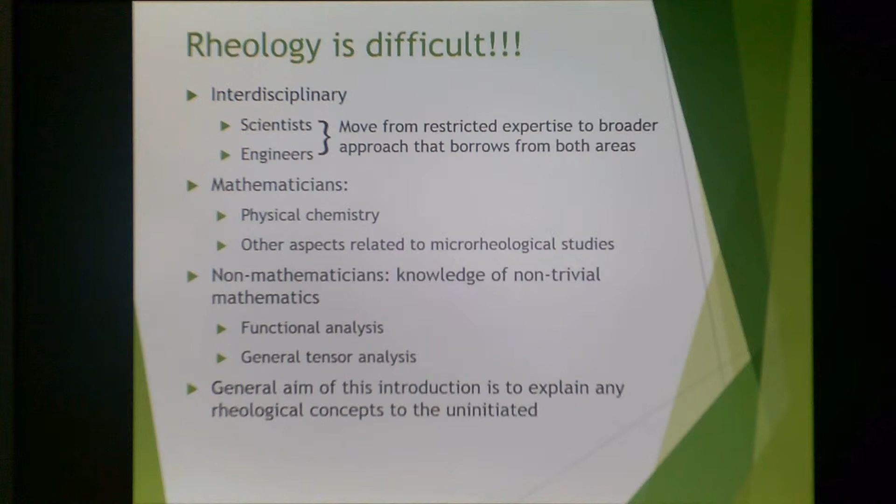The first thing we need to discuss is the fact that rheology is not a basic subject. It is a very interdisciplinary subject, and it can be very difficult to understand. Traditional scientists need to move away from their expertise to understand some engineering concepts, and engineers also need to step in and understand how chemistry, physical chemistry, relates to the materials they're looking at. For mathematicians, an understanding of physical chemistry is necessary, and other aspects related to microrheological studies like interfacial dynamics. For the non-mathematicians among us, a knowledge of non-trivial mathematics is necessary. Functional analysis is part of rheology, and so is general tensor analysis. The general aim of this introductory lecture is to explain rheological concepts to the uninitiated.

Rheometry is the measurement of rheological behavior. Materials are generally investigated in simple flows: steady, simple shearing flow, small amplitude oscillatory shear flow, and extensional flow. The application of these simple flows allows us to avoid some of the mathematical difficulties while still understanding and observing the full rheological behavior.

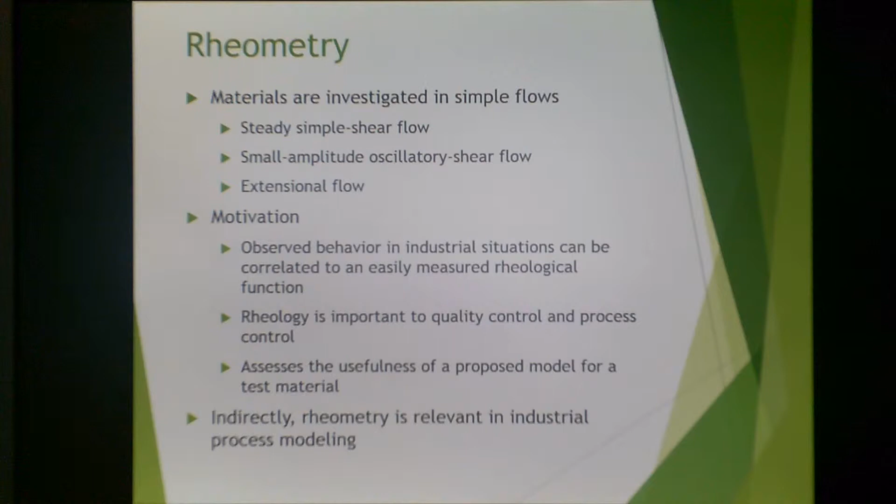The motivation behind rheometry is often that the observed behavior in industrial situations is correlated to an easily measured rheological function. Rheology is important to quality control and process control in an industrial setting, and it is useful in assessing the usefulness of a proposed model for a test material. Indirectly, rheometry is also relevant in industrial process modeling. Understanding the rheological behavior of your material gives you more control over your process.

In the previous lecture, we talked about the modern view of rheology, and that the extremes—classical elastic theory as determined by Hooke's law for solids, and Newtonian fluid mechanics as defined by the Navier-Stokes equation for fluids—fall outside the modern view of rheology. Rheology seeks to study materials that fall in between, the viscoelastic materials, such as Weber's silk thread, a viscous solid, or Maxwell's gases, elastic fluids.

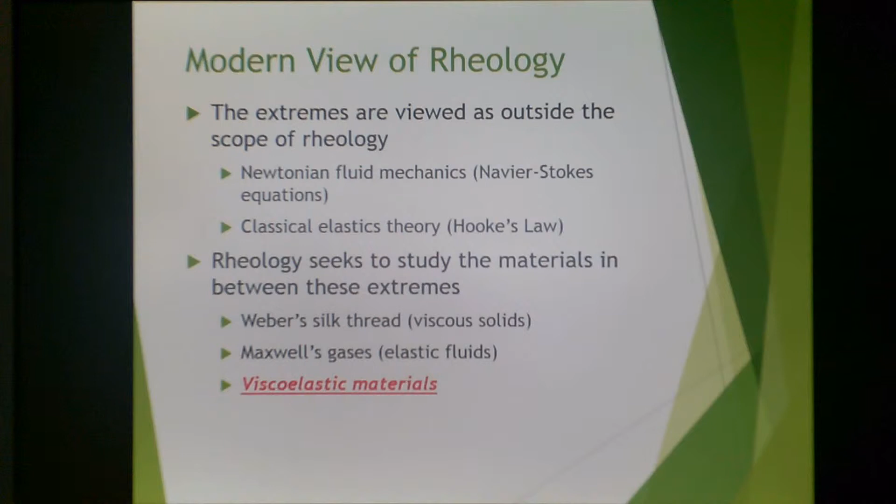There are two important considerations to keep in mind as we move forward. First, intermolecular forces in the material we're looking at control how the material behaves; in other words, chemical nature controls physical response. Second, the time scale of our measurements or observations is very important—different physical responses can be observed at different time scales for the same material, so you have to bring the two together. Rheology seeks to understand material structure from forces and timescales for changes, and microstructural motion from thermal or mechanical energy's effect on the molecules themselves.

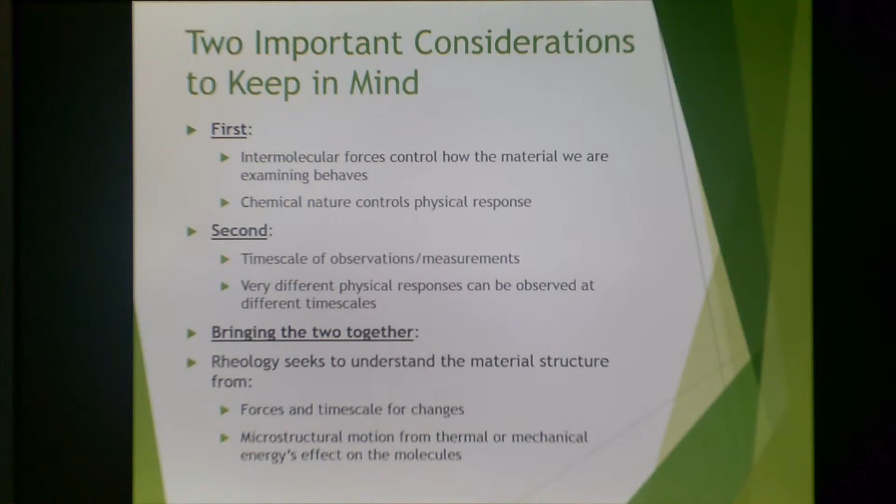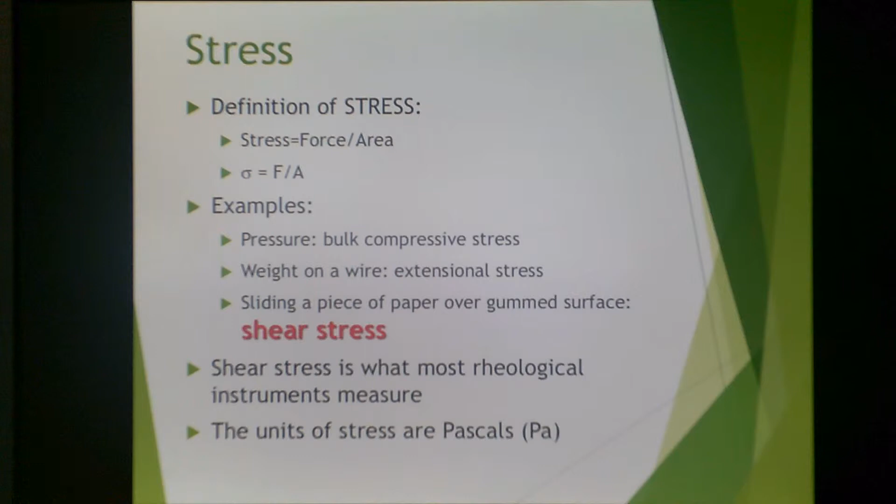First, we're going to define a few terms. The definition of stress is stress equals force divided by area, or sigma equals F over A. Some examples: pressure is a bulk compressive stress, a weight on a wire is an extensional stress, and if you slide a piece of paper over a sticky or gummed surface, that's a shear stress. Shear stress is what most rheological instruments actually measure, and the units of stress in this case are pascals.

Defining strain: when a stress is applied, a deformation or a strain results. For the purpose of measurement, we define strain as the relative deformation, or deformation per unit of original length. So epsilon equals L minus L0 divided by L0, where L is the length after deformation and L0 is the original length.

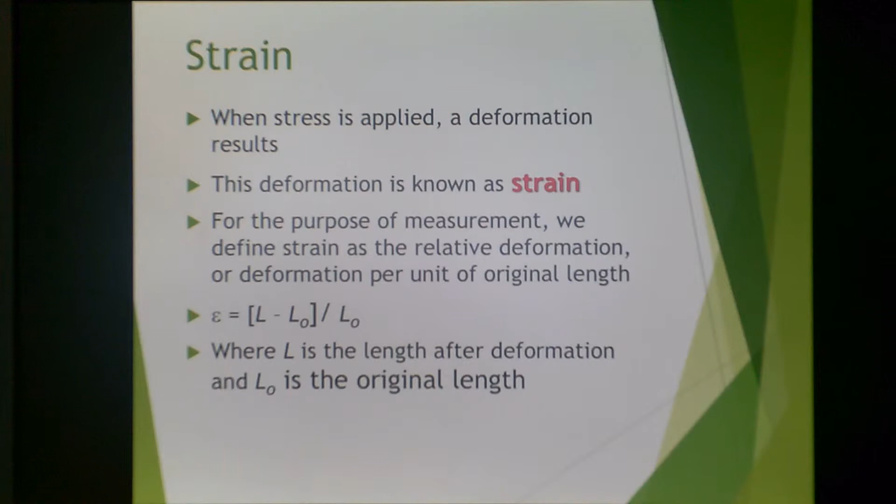In order to understand viscoelastic behavior, we need to first understand the extremes, so we're going to talk about solids and fluids. First, discussing solids: classical solid behavior is when a stress or a force is applied to the surface and results in an instantaneous deformation. Once that deformed state is reached, there's no further movement, no further strain. The deformed state persists as long as that force is applied, and this is considered traditional elastic behavior, things governed by Hooke's law.

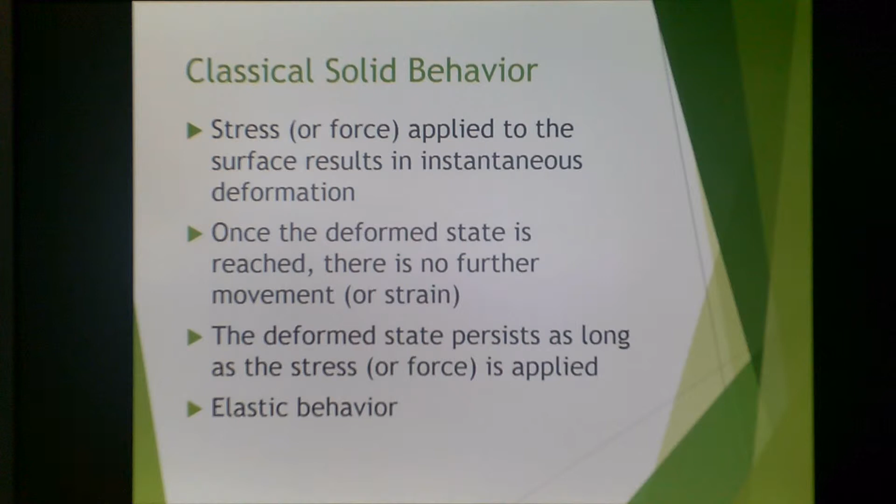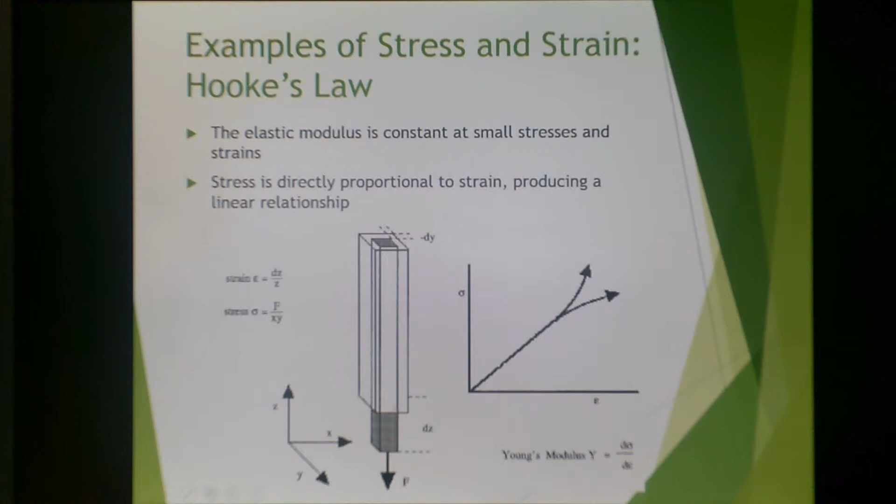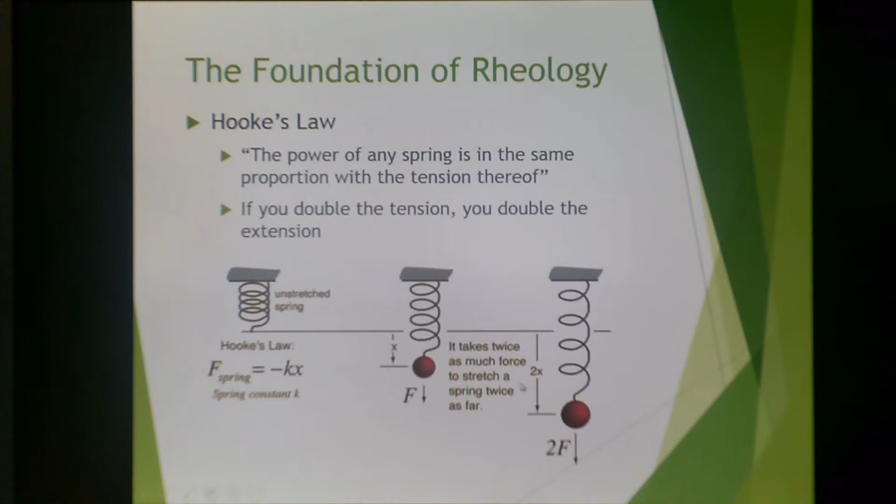This is kind of your traditional spring, which we saw before in our previous lecture. Hooke's law states that the power of any spring is in the same proportion to the tension thereof—in other words, if you double the tension, you double the extension. So Hooke's law is the force on the spring equals the negative spring constant K times x, where x is the displacement. Here we have a displacement x with a force F, so you need twice as much force to get twice as much displacement.

This is an example of stress and strain with no rotation. Shear strain is produced by the application of a shear stress. One of the diagonals is shortening while the other one lengthens, and it's only in one direction.

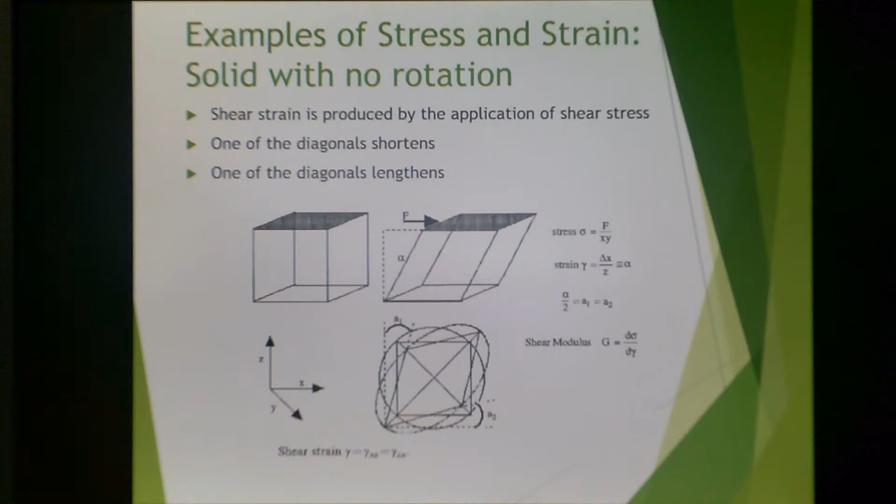This is similar to what we see for a Hookean solid. A shear stress is applied to the surface and results in an instantaneous deformation. Once the deformed state is reached, there's no further movement. The deformed state persists as long as the stress is applied, and the relationship between these two is in proportion. So the stress equals the rigidity modulus times the strain.

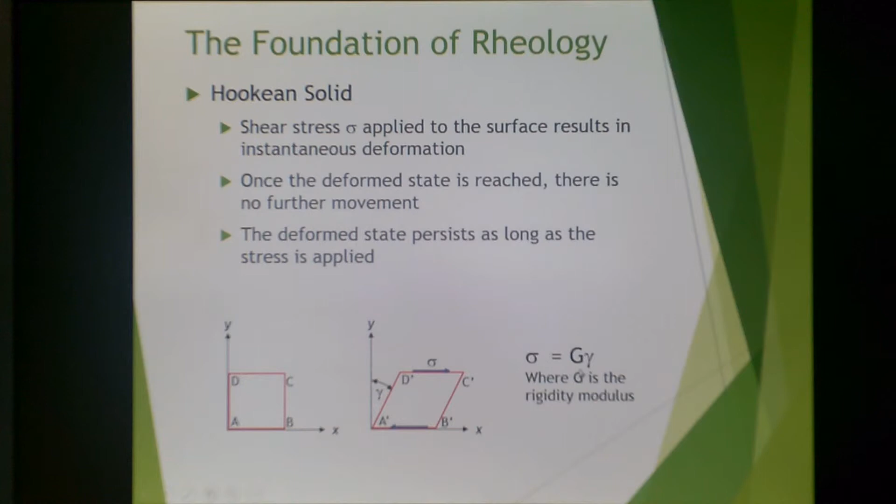Previously we looked at one axis, just pushing on one side. Really, you have to consider all of the axes. Strain is made up of 3 orthogonal elements that can be further divided into components, and these line up with the x, y, and z axes. If we apply a simple strain, gamma, in our rheometer, this is made of 2 equal components, gamma xy and gamma yx. When you restrict to simple and well-defined deformations, you can avoid a lot of the mathematical difficulty and still observe the rheological phenomena.

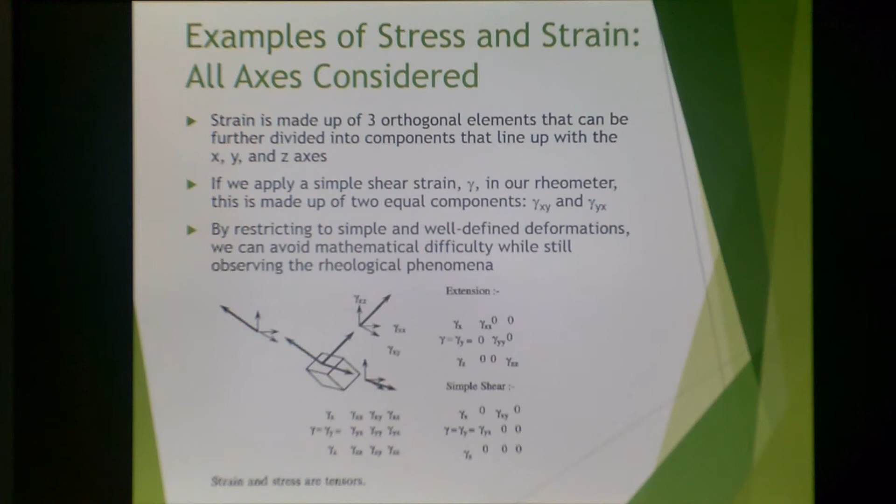You do have to pay attention to the tensor framework. Stress, again, is force per unit area, sigma equals F over A. Oftentimes this is presented as a scalar, and a scalar is a quantity having magnitude and not direction. But you do have to consider a more sophisticated network of tensors to understand rheological concepts. A tensor is a mathematical object that's analogous to a vector, a little more general though. A vector has quantity as well as direction, especially determining the position of one point in space relative to another.

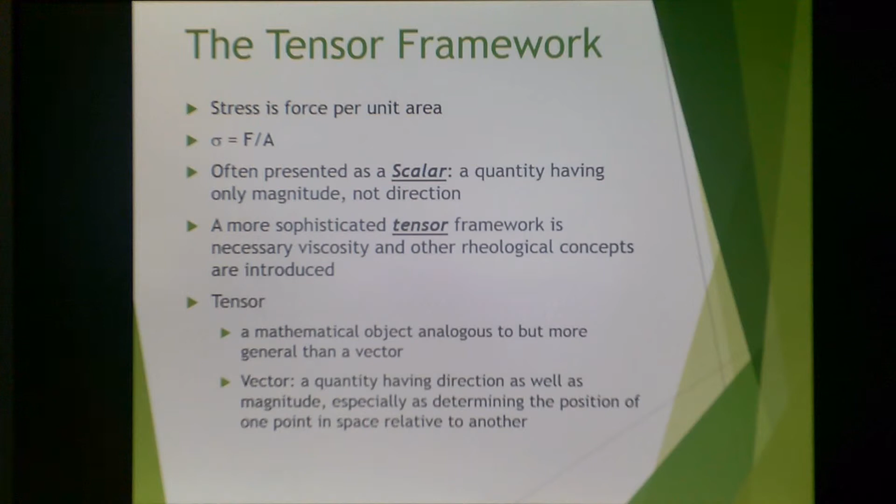Now we're going to look at classic liquid or fluid behavior. Typically we're looking at liquids, but when we talk about fluids, we're not just talking about traditional liquids, we're also talking about gases, though typically the systems we'll look at are actually liquids. In a typical liquid system, motion is produced by the application of a stress, and the motion continues until the stress is removed. A constant stress will produce a constant velocity, or a linear relationship, and this is considered viscous behavior.

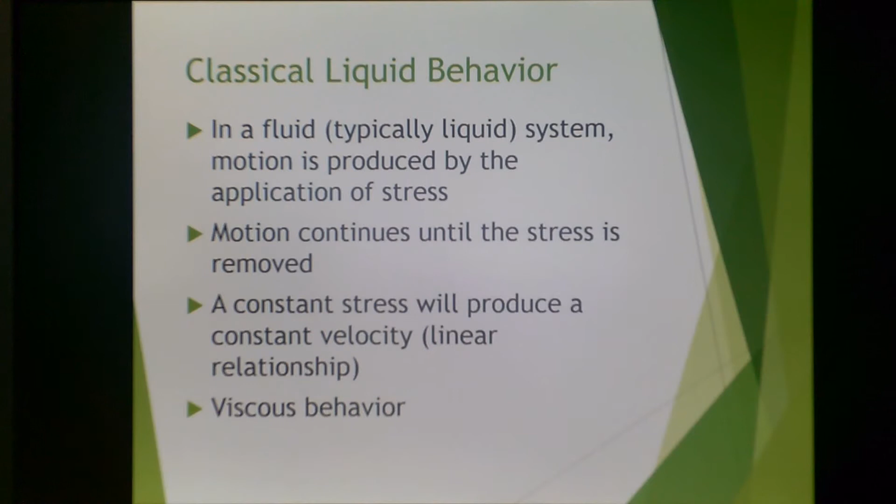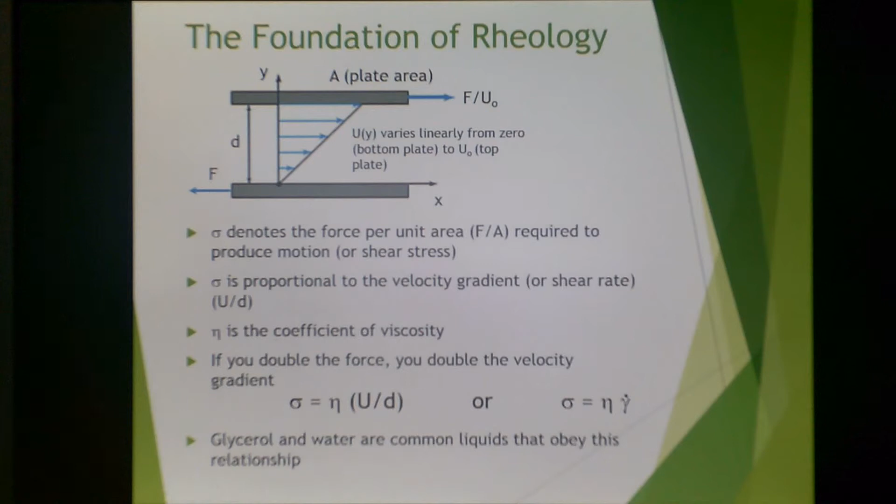Eta is the coefficient of viscosity, or viscosity from this point forward. If you double the force, you double the velocity gradient, so you get this linear relationship: sigma equals viscosity times U over D, the velocity gradient, or sigma equals eta times the shear rate. This is the relationship for Newtonian liquids, and glycerol and water are common liquids that obey this relationship.

For linearity in rheology, these 2 relationships describe elastic and viscous behavior. For a Hookean solid, we're looking at elastic behavior. For a Newtonian fluid, we're looking at viscous behavior, where shear stress is related by a constant to a shear rate, a direct proportionality. Any viscoelastic behavior we've considered thus far is also linear, and this linear framework of proportionality can accommodate a wide range of rheological behavior. However...

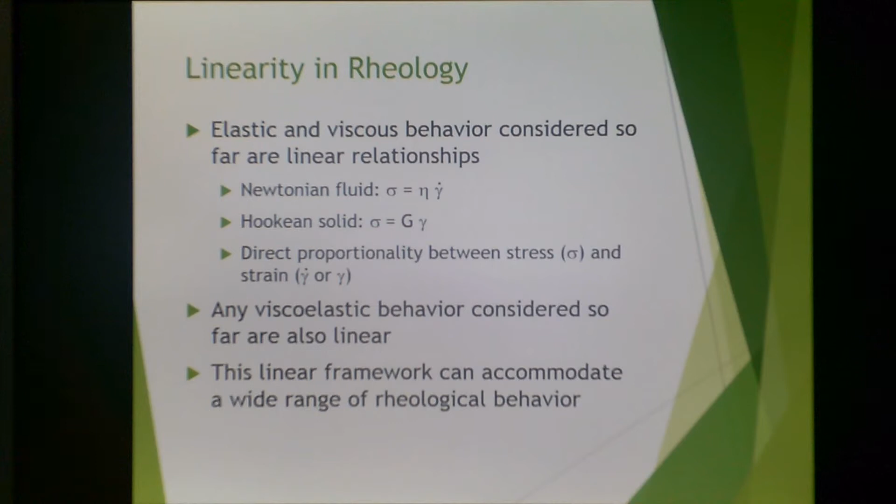Nonlinearity is also very important to understand, and that's where we're moving beyond defining these solids and fluids, since the framework of linearity can be very restrictive. Material properties change with applied stress; in other words, the rigidity modulus or viscosity can change with applied stress. The range of stress where materials behave linearly is limited. The applied stress need not be high to see nonlinear behavior, and this change can occur instantaneously or over time, increasing or decreasing the material parameter of modulus or viscosity.

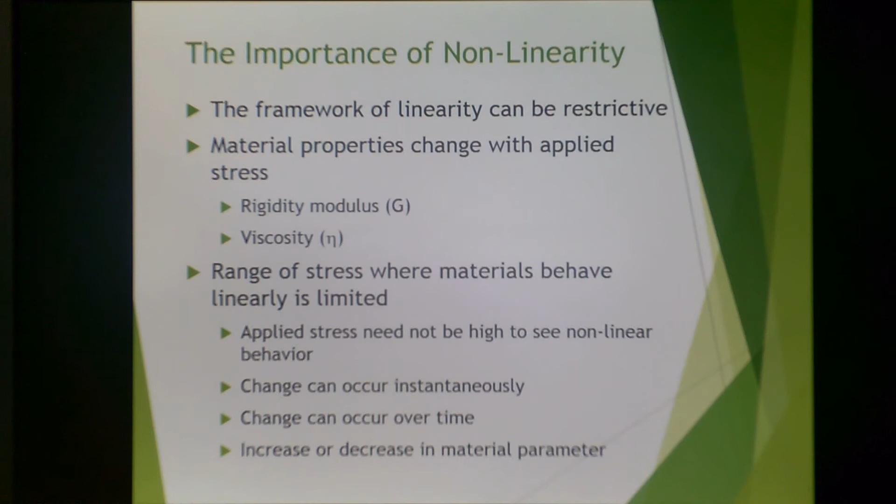Some examples of these are shear thinning, a reduction in viscosity with increased shear rate in steady flow. If you're talking about time independent behavior, that's pseudoplastic behavior. If you're talking about time dependent behavior, that's thixotropic behavior.

Time independent pseudoplastic behavior - one example of that is toothpaste. It sits on top of the toothbrush bristles without moving, but it can be easily squeezed from the tube, and that change in viscosity occurs almost instantly.

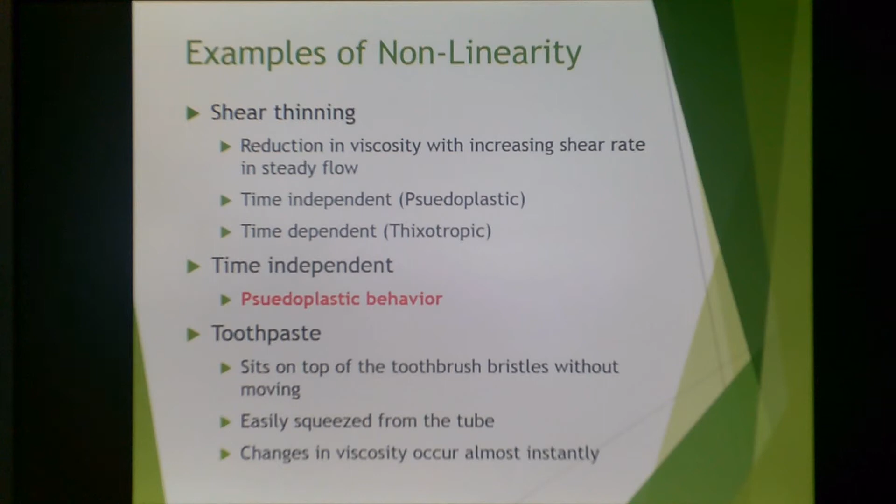Time-dependent shear thinning, followed by recovery, is thixotropic behavior, and one example of this is non-drip paint. This is time-dependent - the shear thinning does not occur instantaneously, but as you spread the paint up the wall. The painter doesn't really notice the increase in viscosity after removing the stress, but you notice the result: you don't get paint dripping down the wall, and it stays on the wall while still wet.

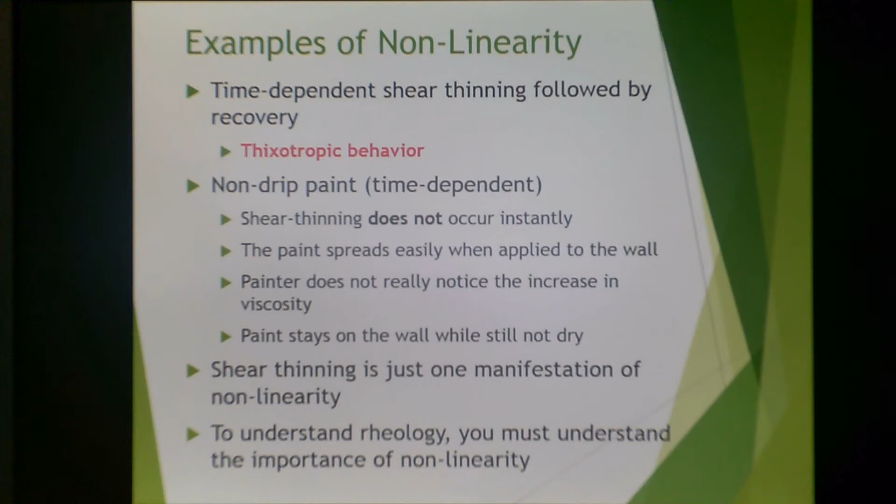Shear thinning is just one manifestation of nonlinearity. There are many, and to understand rheology, you must understand the importance of nonlinearity.

Here's an example of multiple different nonlinear fluids. All of these are time independent. So this is shear stress versus strain, in this case shear rate. There's a linear relationship for Newtonian fluids between shear stress and shear rate. For a pseudoplastic or shear thinning material, you have this sort of behavior. In the case of a Bingham solid, you have an initial shear stress that must be overcome, and then it behaves linearly. For a Herschel-Bulkley fluid, you have an initial shear stress and that behaves pseudoplastically.

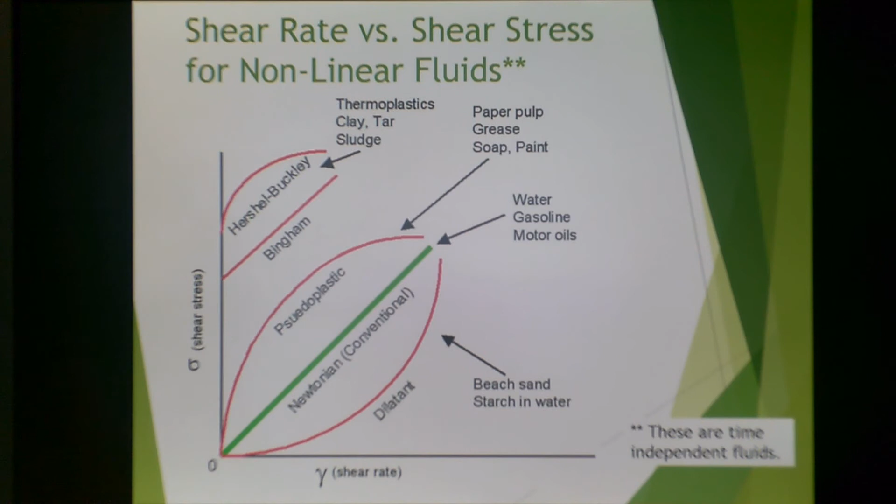One interesting material is a dilatant fluid, where you have shear thickening behavior - this is the viscosity getting thicker as the shear rate increases. We're going to do an activity where we mix starch with water to be able to see how this behaves.

Here we have shear rate versus shear stress for nonlinear fluids that are time dependent, shown here as thixotropic fluids and rheopectic fluids. These demonstrate a time-dependent decrease in viscosity for thixotropic fluids - in other words, the longer the fluid undergoes a shearing force, the lower its viscosity. For rheopectic fluid, this is a time-dependent increase in viscosity - the longer the fluid undergoes a shearing force, the higher its viscosity.

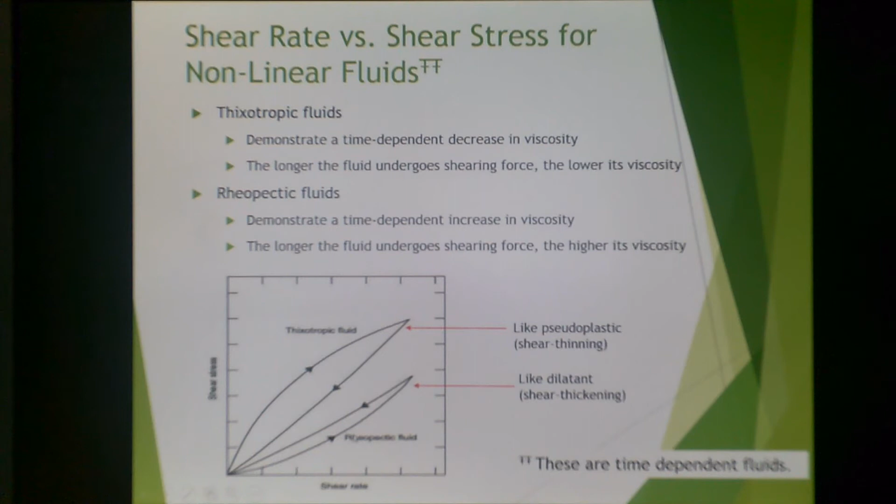So first, for a thixotropic fluid, it undergoes shear thinning or pseudoplastic behavior followed by a recovery. And here you have a rheopectic or dilatant behavior followed by a recovery.

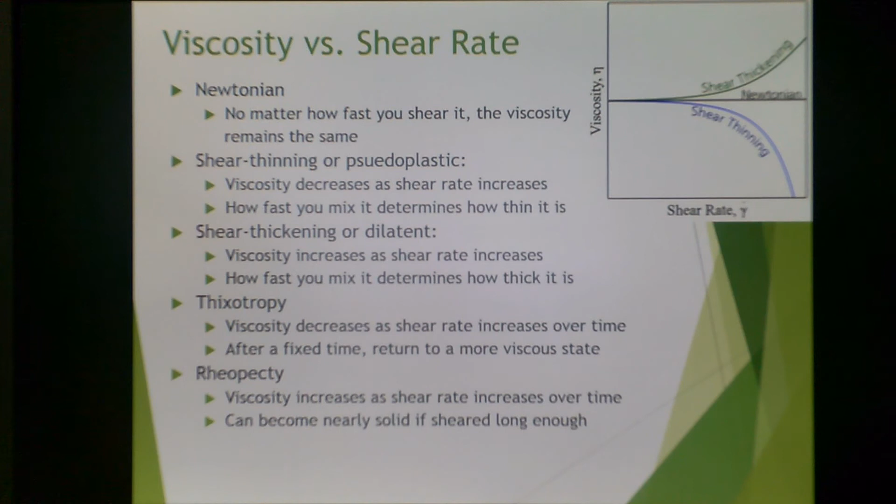So, for a solid or a liquid, you need to qualify viscosity and elasticity. You don't really have a true solid or a true liquid when you're dealing with a real material - these display one or both of these properties at the same time. You can get liquid-like properties in a solid, or solid-like properties in a liquid. So you really do have to describe which property dominates, elasticity or viscosity.

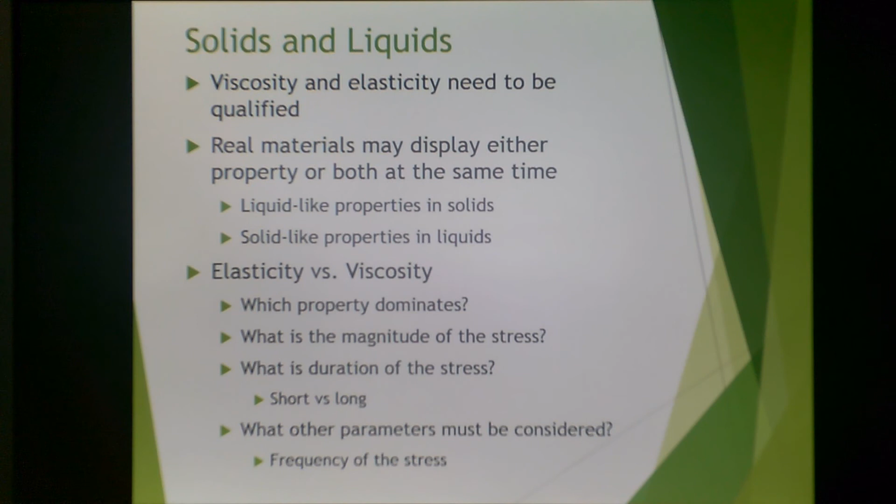You also have to specify the magnitude of the stress, the duration of the stress, whether it's short or long, and what other parameters must be considered, like frequency of the stress.

So, given our understanding that we've now kind of gone through, we can now define solids and liquids in the following manner. A solid is a material that will not continuously change its shape when subjected to a given stress. For a given stress, there will be a fixed final deformation. This may or may not be instantaneously reached upon the application of stress.

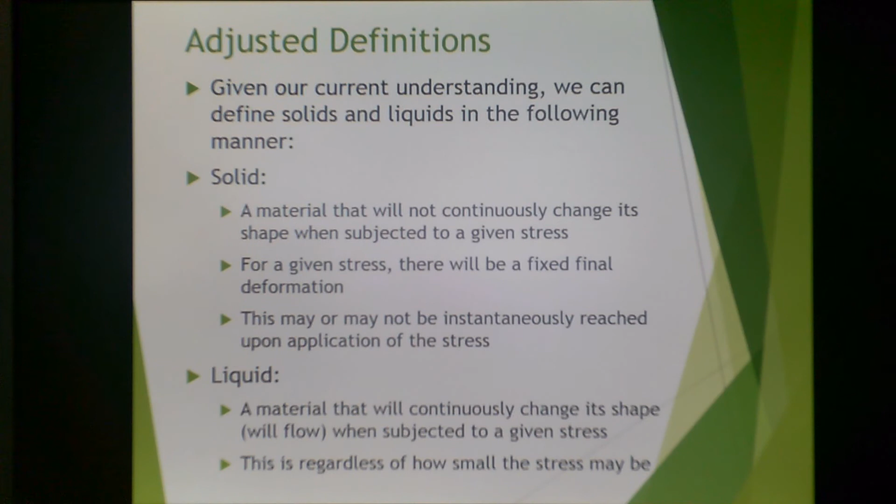A liquid is a material that will continuously change its shape - it will flow when subjected to a given stress, and this is regardless of how small the stress may be.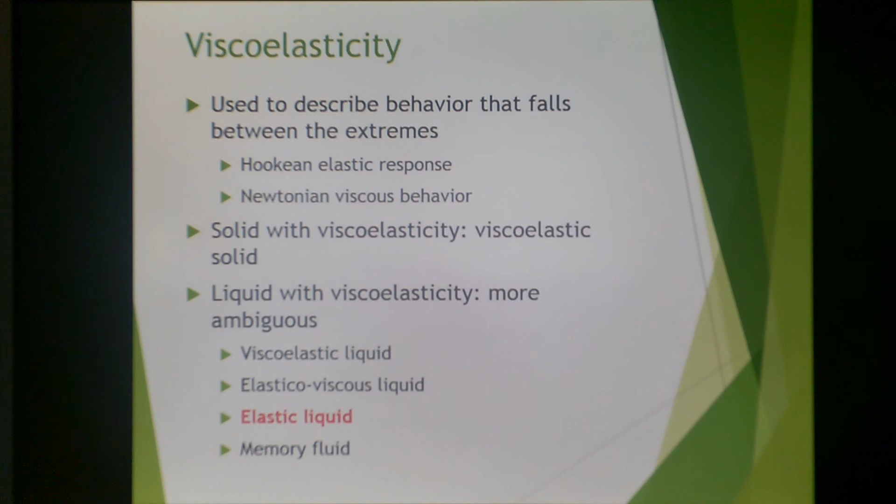Viscoelasticity is used to describe rheological behavior that falls between a Hookean elastic response and a Newtonian viscous response. So a solid with viscoelasticity is a viscoelastic solid, unsurprisingly, but there are many more ambiguous terms for liquid with viscoelasticity. We're going to refer to a liquid with viscoelasticity as an elastic liquid.

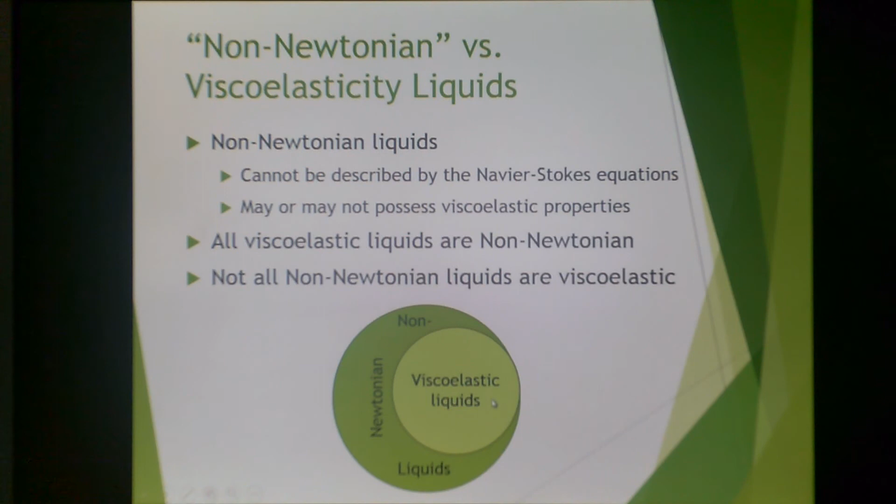Now, oftentimes, non-Newtonian and viscoelastic are used interchangeably, and that really should be qualified. Non-Newtonian liquids are ones that cannot be described by the Navier-Stokes equations. These may or may not possess viscoelastic properties. All viscoelastic liquids are non-Newtonian, but not all non-Newtonian liquids are viscoelastic, as indicated by this snazzy Venn diagram right here. So you have a bunch of non-Newtonian liquids, and viscoelastic materials are part of that set.